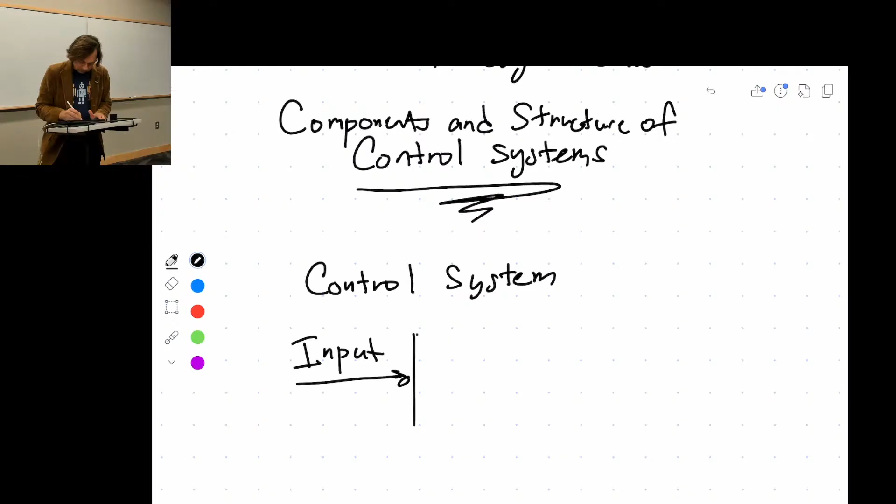Now, a control system has an input, then you have some kind of system, and then you have an output. Okay? And this input here is a thing that we want. Control is about trying to get what we want. And what do we want? And the output is what we got. In our first lecture, we would call this a desired signal. And the output is the actual signal or the measured signal.

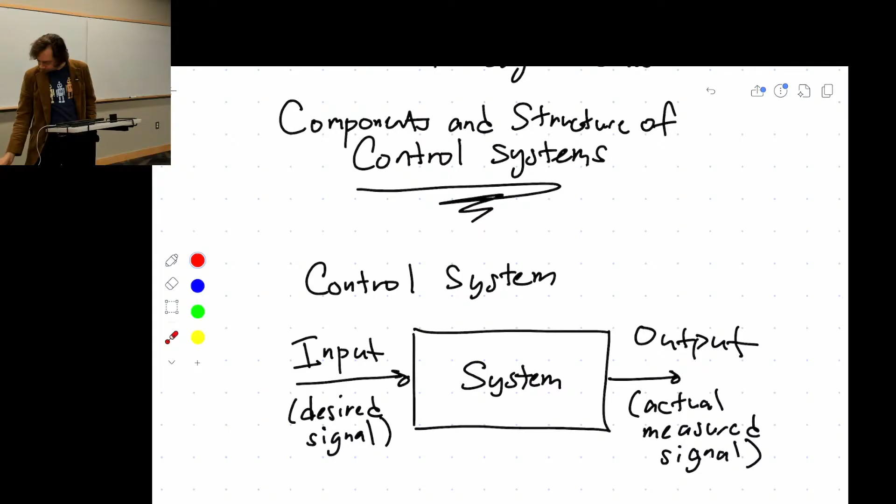Okay? And this whole thing in the middle, everything in between, is your control system. Looks so easy when there's just a block on a page. Well, it's a little bit vague, all right? But inside of that system, we have subsystems. I'm going to draw the word system on the outside. In that system, inside you're going to have processes. And you have lots of them.

I mean, if you think about a car that you turned on cruise control, your desired signal is you want to set a speed for your car. The output is what speed did you get. But there's a lot of components inside of that system that make that go. One, you have to be able to have a dial that, once you set the desired signal, there's going to be some computer that's going to take in that signal and say, all right, thank you very much.

I'm going to then send a signal to the throttle, which is going to accelerate or not accelerate the car, which inside of an engine is going to shoot in more fuel or not more fuel injection, which is going to combust, and then it's going to cause the engine to provide power to the wheels, and the wheels provide power to moving the car forward. So you have a system going into a system, into a system, which ultimately results in the speed of the car. So lots of sub-processes.

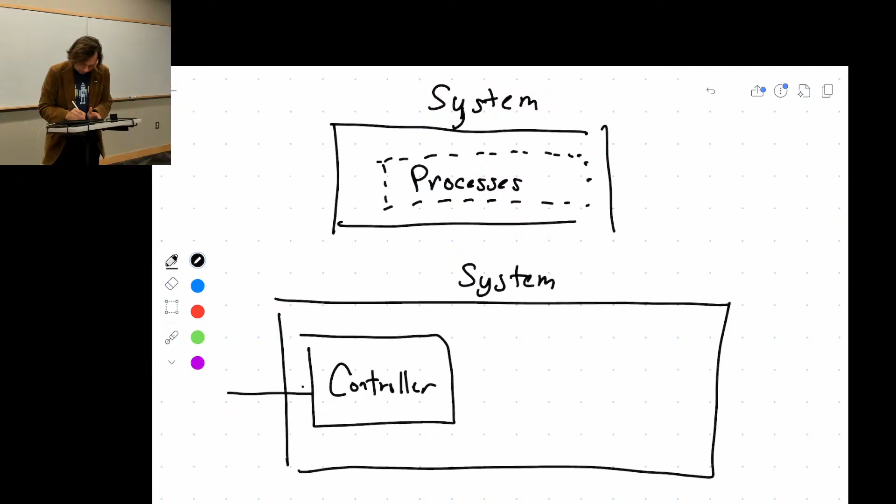So what we will do is we will break down this system typically into a controller, if it's a control system. So in goes the signal to the controller, and then that controller goes to the plant. Okay?

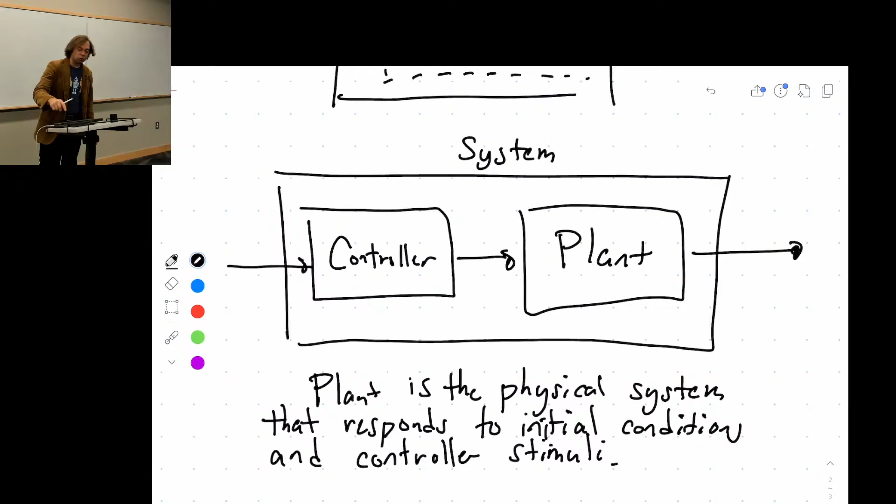So a plant is the physical system that responds to initial conditions and controller stimuli. It's the physical system. If you're the control engineer, you're probably not changing the plant. Think of it more like a power plant, less like a house plant. Okay? That is the general term within control. What's your plant within control systems?

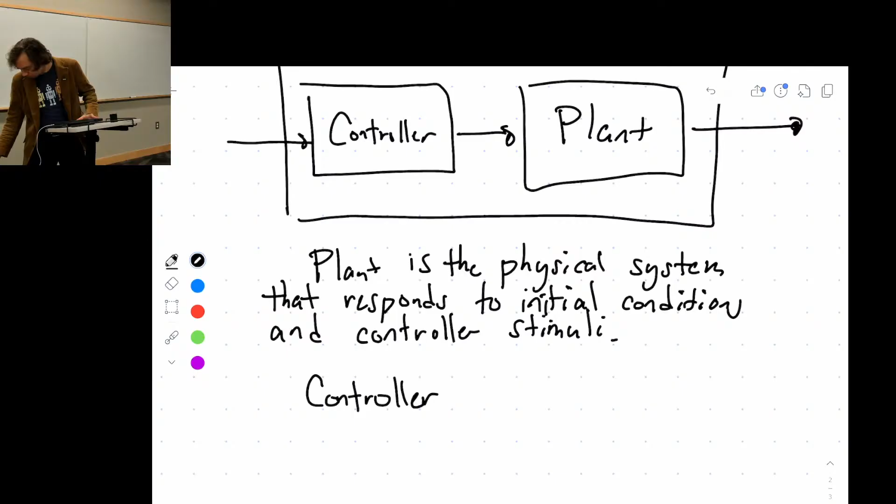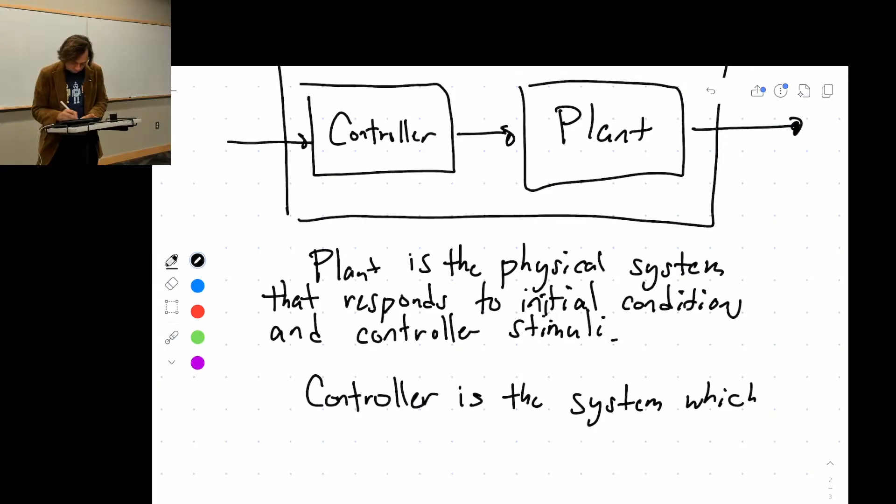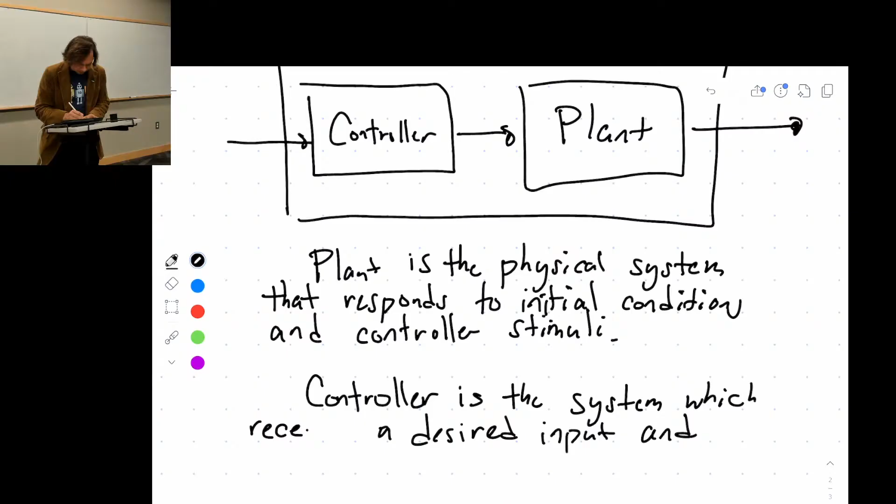Okay? So with your cruise control, the plant is the whole car and everything inside of it, except for the controller. The controller is the system which receives a desired input and sends, I before E except after C, excuse me, receives a desired input and sends an actuation signal to the plant. If it's cruise control, how much do I want to gun the throttle? Okay?

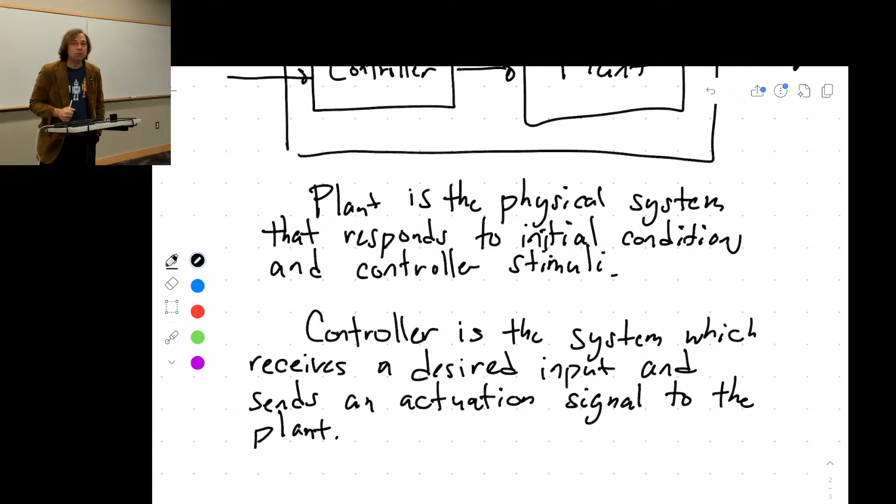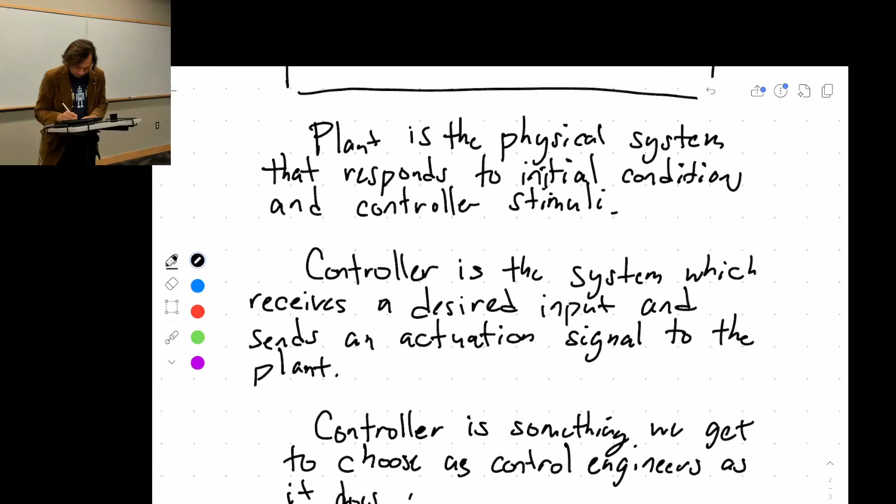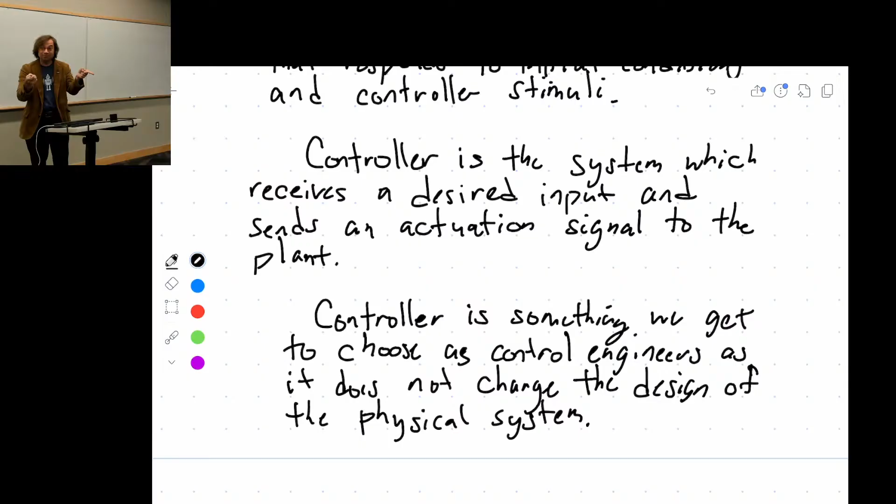But most critically and informally, the controller is something we get to design. We get to choose it as control engineers, as it does not change the design of the physical system. Right? So who gets to choose the controller? You do. Right? It's often written in code these days. Makes it easy to change thanks to the invention of programmable computers.

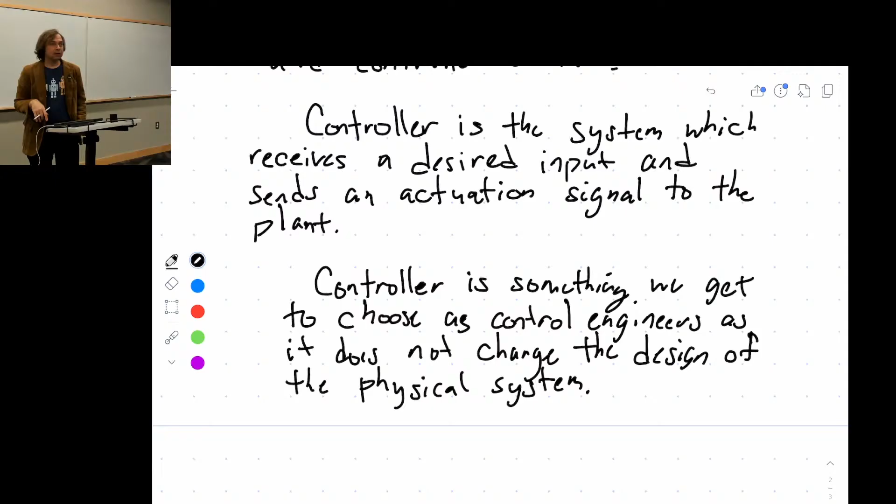Okay? But again, just because it's written in code does not mean that the most useful way to think about it is code. We will be thinking of these things in terms of equations. We talked about this last lecture. Some of these equations will look like simple relations between, oh, how far away am I from where I want to be? Add a little more oomph, take away a little bit more oomph. That's what P and D controllers are. All right? PD controllers. So they might look something like this.

Right? Where some u(t), that's your control, is equal to some capital K times some V desired, that might be your desired speed, minus V(t), which is your actual speed. Okay? This could be a controller for your cruise control, where this is the speed of your car. Doesn't need to be like this, but this is an example. Now, who got to choose all of this? I did. I just made it up. Hopefully it works. If only you were in a class called Analysis of Control Systems to know.

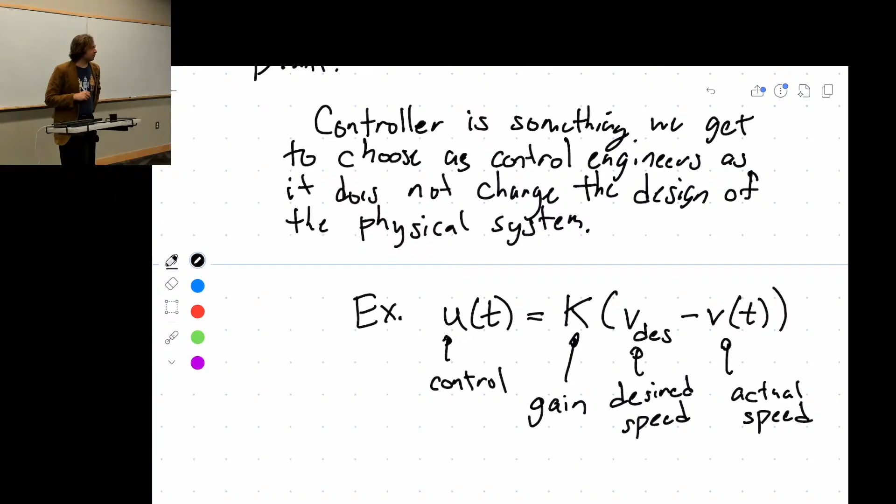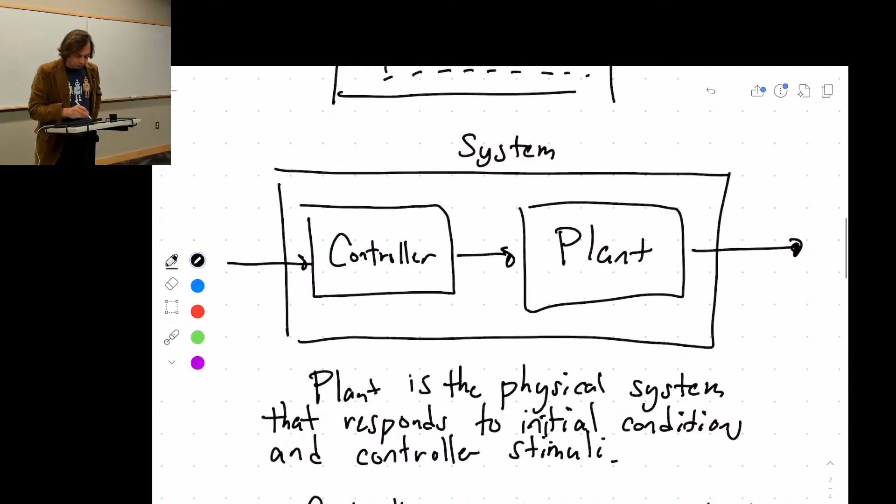It will work, right? This particular letter right there, K, you'll see it a lot in this class. Just as a preview, it's called a gain. It's a constant. Generally speaking, a positive constant. And as you'll see, if you make those constants negative, a lot of the time, not every time, your controller will go wild. So, all right, that's what the controller is, right? So you can, generally speaking, view the controller as the thing we choose as control engineers, and the plant is the physical thing we don't change.

But even within the plant, obviously we're going to have subsystems like we talked about. You have the car, which is going to have the throttle, it's going to have the components of the engine, it's going to have the axles, the wheels, the physical body of the vehicle is all going to be carried forward, right? So inside, we often think of the plant, which has some control input there. It has two blocks on the inside. The first of which is the actuator. And this here is your main process.

And the key difference here is that the actuator takes in a signal, something that we want, which might not have a lot of power to it. It just might be a little signal on a wire saying the number 12. Okay, I want 12. And then the actuator's job is to take that signal and do something that has the capability to do physical work on the system, right? If you work in electronics for physical devices, you'll notice there's often a big difference in the power requirements for something that's doing the logic of saying how much you want something versus the power it takes to do that thing, right?

If you're an electric car, the power it takes to say I want 50% throttle is not the same as the power it takes to accelerate the car to 60 miles an hour, right? So it's the actuator's job to convert that logic signal into an actuating signal that provides power. So the actuator is a device that provides input that directly drives the system.

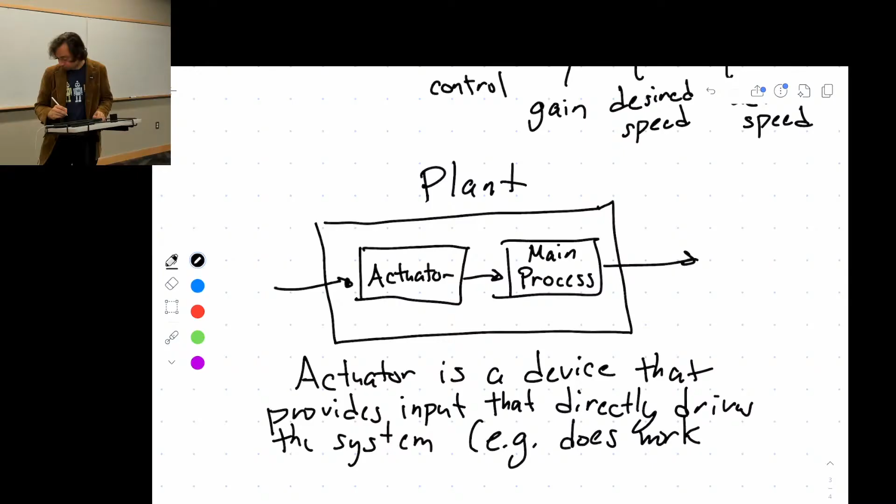Example, it does work. Okay? Okay. It does work. And here's some examples. You have the motor on a car. Or if you're doing a pipe flow problem, let's say you want to, here's a control system.

I'm going to assume that most of you have showered this morning, and I won't ask if that's the case. But you might have a preferred temperature that you want of that shower. And if you are in a normal human shower that's not super fancy, you got cold and hot, right? Okay? You're like, all right, I like my showers nuclear hot, as my wife says. Okay? So I'm like dialing up the valve a lot, right? And if it's too hot, which is rare, I put in a little bit more cold, right?

The actuator is the valve. I've twisted the valve, but then when the valve opens up, that's doing physical work. That's letting pipe flow go through, letting the hot water go through. The valve is the actuator. Okay? All right. Other examples of actuators. Anyone can think of anything?

For the motor, would it be like the throttle body that gauges how much air goes into the motor? Yeah. So you say the throttle? Throttle body. Throttle body? Is that what it's called? I'm not a car guy. It's what you're doing when you press the pedal, there's a little throttle body that's like a valve where the air goes through from the intake. It basically opens more as you press the throttle more to let more air in, and thus create more power due to letting more air react with the gas that's injected into the engine.

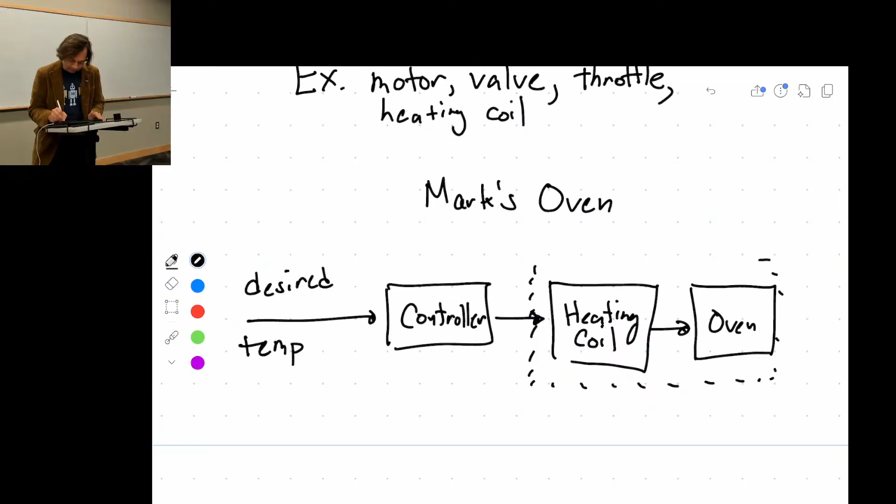Which then heats up the actual oven. Okay. And together, this heating coil and the oven are the plant. And out comes the actual temperature. I'm running out of room. Actual temp. Okay?

So, how do you know, Mark, frozen pizza expert, that the pizza's ready to go in the oven? Well, typically when it beeps, but I just like put it in before it's done. Okay, so you say typically when it beeps, but you have your own special pizza recipe where you put it in before. Yeah. Okay, well, that's probably a well-kept secret as to why you do that, so I won't probe further. But there's a beep.

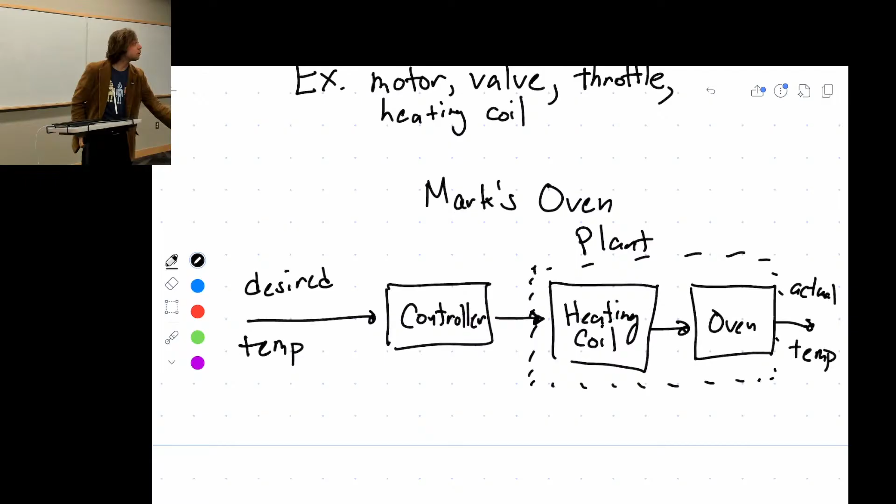The beep. How does it know to beep? When it reaches the desired temperature. And how does it know that? How does it know it's reached the desired temperature? Do you know? Probably a sensor. Probably a sensor. I would say definitely a sensor. There's a sensor that tells you that it's reached the desired temperature.

So the sensor, the way we draw it, is it takes this signal of temperature, and so this sensor will read that and be able to tell us what temperature it is. So a sensor is a device that measures the response of a system. And typically the sensor we'll put as a little signal that breaks off.

Okay, we measure. Now when you're cooking your pizza, does the temperature keep going up? No. Really? Yeah. Doesn't keep going up. How is that? I know you didn't code the controller, so I'm not holding your feet to the fire on that. Well, obviously that sensor is informing the oven to stop heating up more, right? We're at Mark's desired temperature of 425, as we all know is the proper temperature for frozen pizza.

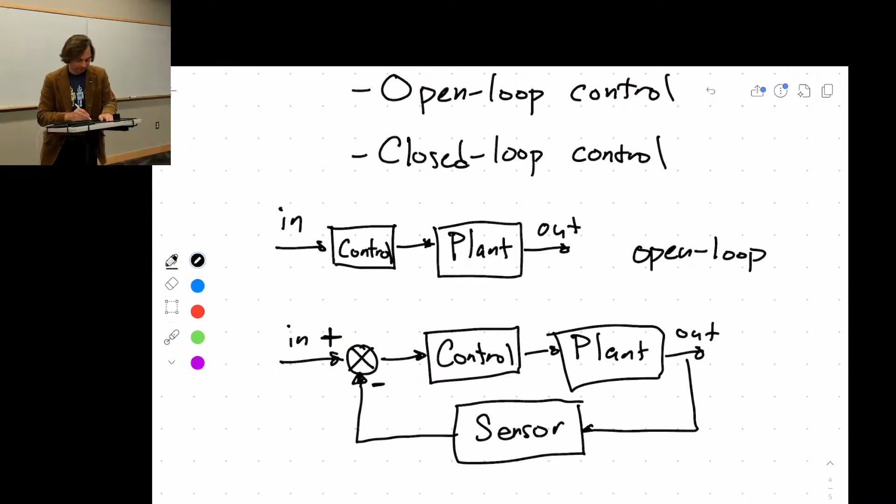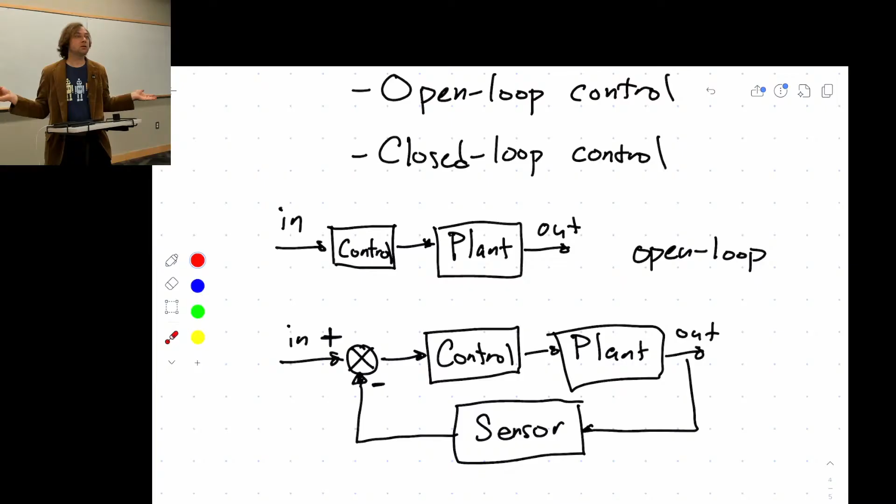and the way we draw on a summing junction, we will draw that, hey, we want to add that signal. And if we want to subtract the signal, we put a little negative sign. Okay? So the output of this summing junction is going to be this minus that. We're comfortable with that level of math? If not, see me after class. Okay? All right? It's not rocket science, it's just control systems, right? We're just adding. Okay? That is a closed loop. Open loop system, closed loop system.

Okay. Now, the benefits of the closed loop system are kind of obvious. You can correct for things that happen that you didn't see coming, such as impatient Dr. Hubicki checking on his frozen pizza. All right? Okay? Now, so benefits of closed loop control.

Often known as feedback control. You can correct for unforeseen changes in system variables. That's big. There's a reason that most control we think of is closed loop control. In this room, our room is this temperature because of a closed loop controller.

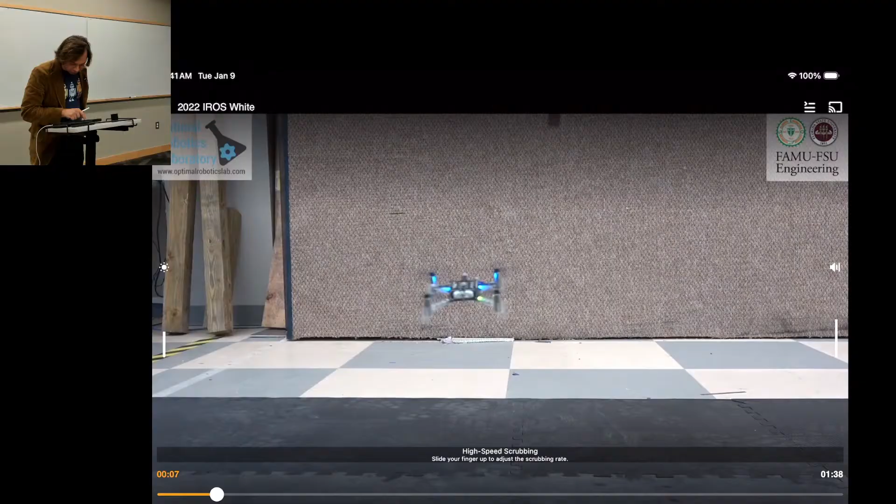All right, I'm going to pause it right here. You can see those on that pendulum, it's a little foam pendulum, so it doesn't kill our little drone here, right? You see those little silver things on the pendulum? Anyone know what those are? I know Cricket does.

Okay, she's not going to say.

That's all right, okay. But those are reflective markers, okay? They reflect light. And we have around the lab motion capture cameras that shoot out infrared light, and those reflective markers shoot it back to the cameras, and they aggregate that information to triangulate where the pendulum is, and just feed that information to the drone, okay?

That's easier to implement than doing just a camera on board the drone. People are working on those problems, obviously now, very actively, but it's trickier to use a camera on board the drone. It's called the egocentric camera because it's on board the thing that's being controlled, okay? So people use cameras all the time, it's just trickier.

Question? How does the drone know whether to go forward or backwards to dodge the pendulum? Oh, some kind of control system, I might say. So it's using a controller, it's called a model predictive controller, to dodge the pendulum, okay? And it's basically choosing the path of least resistance, because what it's trying to do is get back to the center position while not being hit by the pendulum.

And if you're curious, this is the actual paper title. You can look it up. It's on our lab website or even my personal website, okay? But you can see the way that it thinks here.

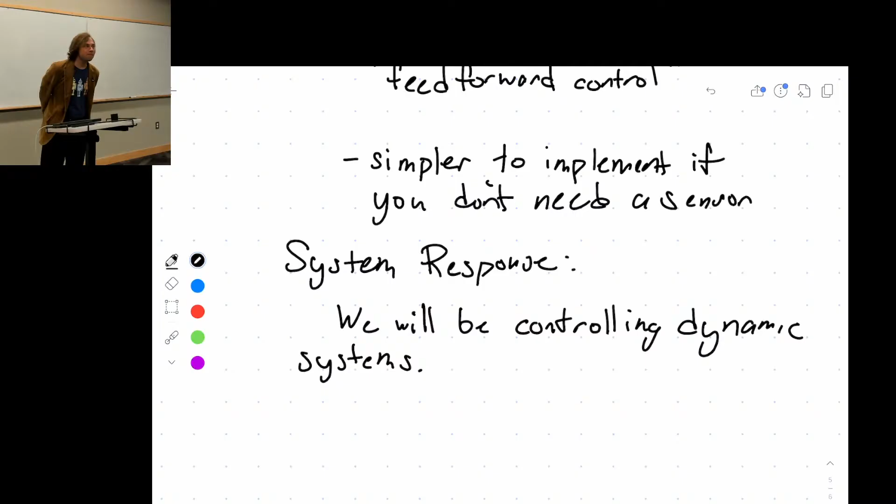There's continuous time. That's like, oh, time is free-flowing, it's a real valued variable, right? It can be 3.25 seconds. It can be 8.96 seconds. 12.29643 seconds. Continuous variables, right? There's also not continuous time, but discrete time, where you're on a clock. Step 1, step 2, step 3, step 4, step 5, step 6. Okay? This is primarily a continuous time system class. We can do some discrete time analysis. That can be useful to even continuous time systems.

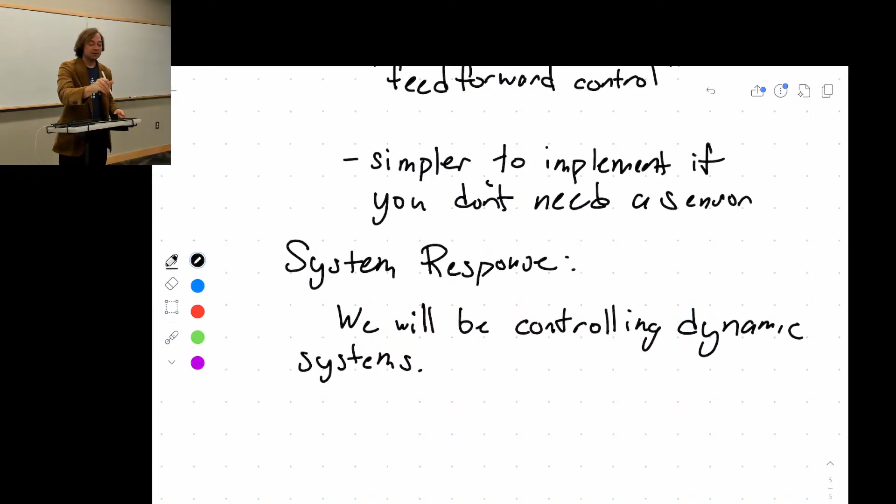Okay? Just an example from my own research. If I want to know if I'm going to walk or fall down, I can do a stability analysis where, yes, I could try to analyze the continuous free-flowing motion of my body, right? Or what's very typical in the field is that when I'm taking one step, boom, boom, boom, every step, at the instant my foot hits the ground, I take a snapshot of how fast all the parts of my body are moving and where they're at. Then I do it again at the next step, snapshot, right? And analyze those snapshots as two discrete points in time, okay?

If you take Dr. Clark's biorobotic locomotion class, he covers this exact technique. It's a very powerful technique. Even though it's a continuous system, you can do discrete time analysis. So we will be controlling dynamic systems. These are systems whose variables change over time. Okay.